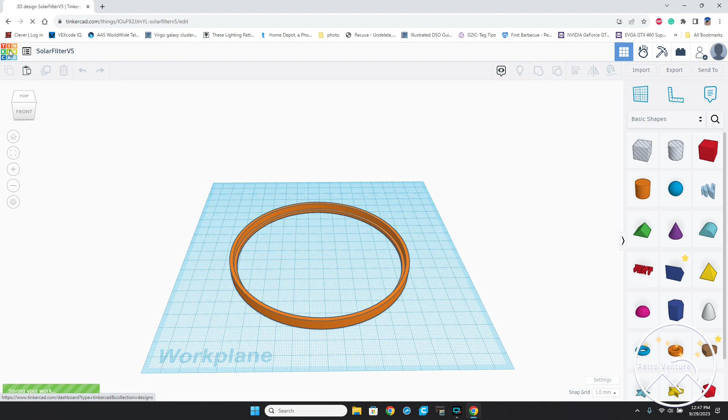So we're going to go ahead and get started here with a 3D design. First thing I'm going to do is grab a round. The program I'm using is Tinkercad, a free program to do 3D design. It's very simple, a great one to get yourself started. Of course there are more advanced programs, but this is great to get started. Go to Tinkercad.com, sign up, register an account, and there you go.

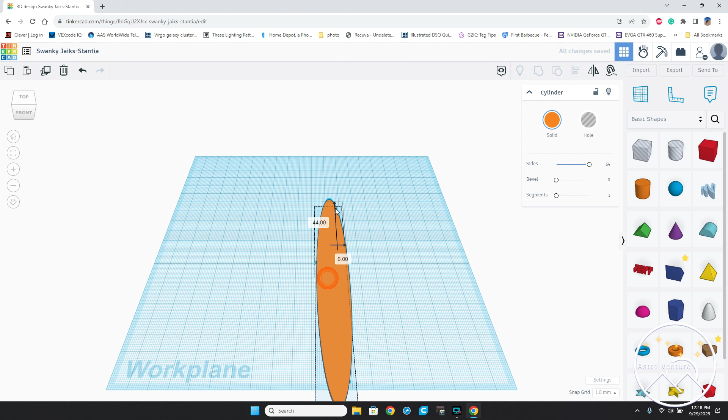So here we go. I put the sides, slid that up to 64 so it's nice and smooth. This is going to be set at 2 millimeters. The size I'm going to need for this is 149 millimeters. The reason I'm doing 149 is the 3D printer I'm using prints to a maximum of 150, and I never run my printer quite to the edge. Okay, so this is one plate that will be used as part of the lens hood end.

The end is going to actually slide on the lens hood. Okay, next, bring this over here. For this one, I'm again going to slide the sides over so it's nice and round. My height, I'm going to set this at 27 millimeters. The reason is I want 1 inch, and 25 millimeters is an inch, plus the 2 millimeter thickness of this bottom plate, so together that makes 27.

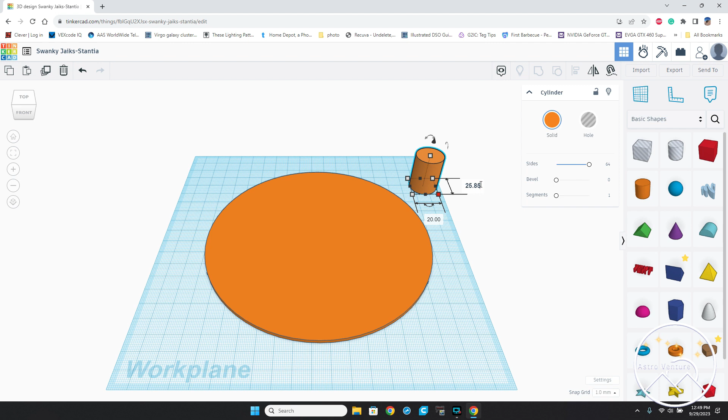Okay, next I need the outer diameter, and based on the hole that needs to pass through and wanting 2 millimeter walls, I'm going to make this 125.85 millimeters. I'm going to bring this over. Then I'll hit Control A to select them all, and align this so it's centered. And again, selecting them all with Control A, I'm going to join these two so it's one solid piece.

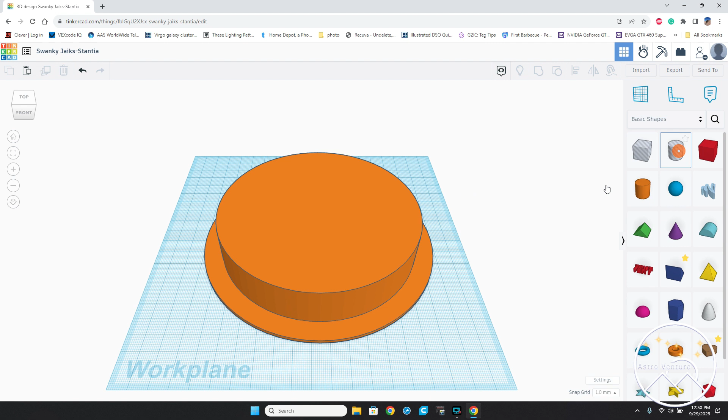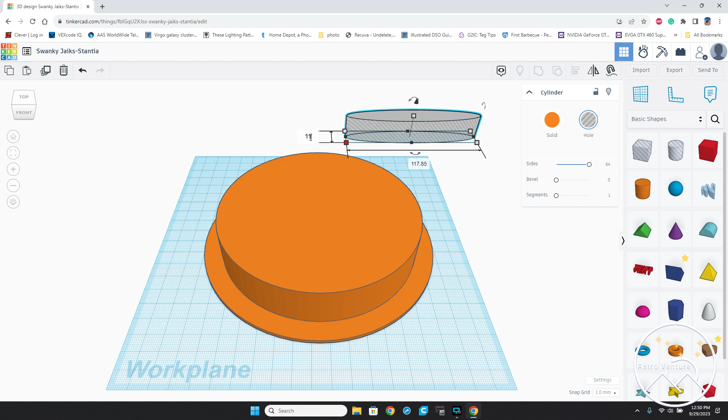Okay, next, I need to pass a hole through for the lens hood to go on, but I don't want the lens hood to hit the actual solar film. So I'm going to build a lip down inside, and you'll see what I mean. To get started, I'll bring a hole over onto the platform, set the sides to 64 so it's round, and set it to 117.85, then move this over. I'll set this to 117.85 again, and make it tall so it punches all the way through.

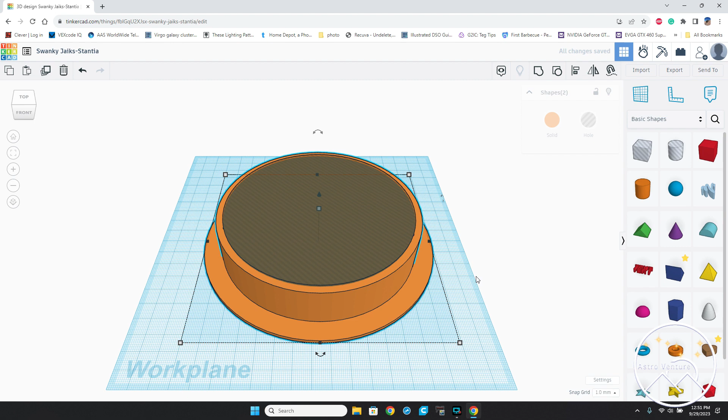27 is the maximum height, but I'm going to go ahead and set it to 28. I'm going to slide this over, hit Control A to select all, and align again. There we go, it's all centered. Control A to grab it all, and I'm going to make it into one. Okay, so here we go.

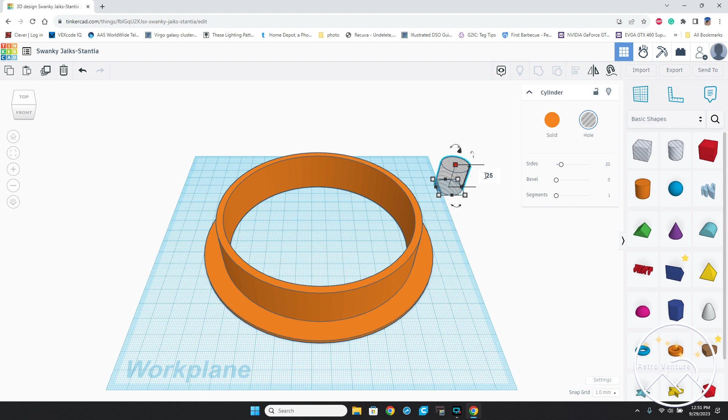We now have that hole passing through, but as I said, I want a lip down in here to prevent the lens hood from sliding into the actual film. So I'll grab a hole again, bring it over, and set the height on this one at 25. The reason is because I'm going to lift this off the platform by 2 millimeters, and that's what you're seeing here. It's now off the platform by 2, so that'll give me that lip.

Now, the size that I need, as I said earlier, the inner diameter, the opening that I need, specifically to my printer, messed around with to get exact—I need 121.85 millimeters.

And then I'm going to come over here, 121.85 millimeters. I'm going to slide my sides up to 64 so it's smooth and round. I'm going to drag this over on top. I'm going to hit Control A to select all, and I am going to align. Here we go, we are aligned.

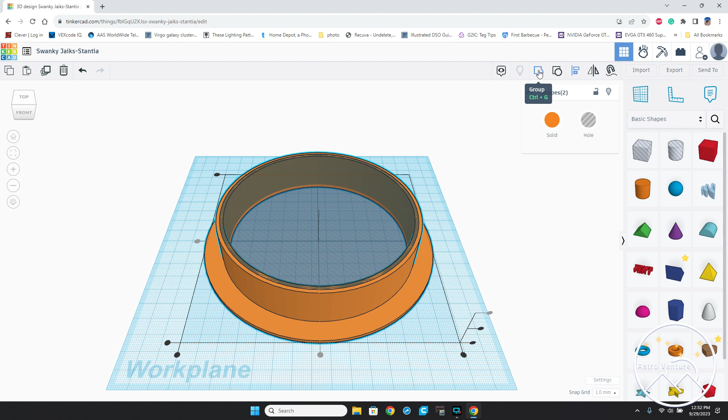Now what I will do is come up here and click Group, put them all together, and now you can see this lip on the inside. So when my lens hood slides down and in, it will bump into this lip now before it actually hits the film. Because of perspective, it looks like it's wider here and thinner here, but it's not, it's just the perspective of what you're looking at.

So here we go, this is the part that will actually slide onto the lens hood. Next, what I need to do is pass through some bolts that will join the plate that we're going to design in a moment, but I need to get those holes set up.

So I'm going to come back over, grab a hole, bring it in. 3 millimeters will work great for the small bolts that I'm going to pass through.

Now what I'm going to do is bring this over to the side. I'm going to select it one time, come up here and duplicate, and then move the duplicate over. I'm going to duplicate again, there's the third one, duplicate again, there's my fourth. So I have the 4 holes that I'm going to be setting up to go through this.

Okay, so let's grab this first one, I'm going to bring it over here. What I want to do is get this lined up, centered left to right, and lined up with this bottom edge. So I'm going to left click and drag, and because this box that opens goes over the screw hole we're about to put in and part of the solar filter bracket, it will actually select both of those. But notice I haven't selected any of these.

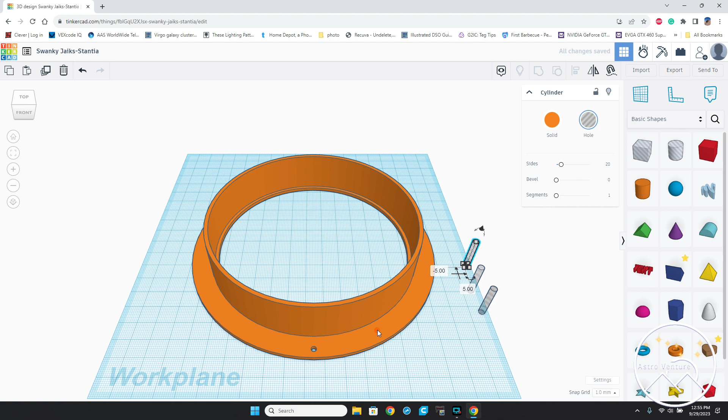Okay, now we're going to do the same thing, but I'm going to rotate this, and to rotate I right clicked and held that down so I was able to rotate. Now I'm going to go ahead and center this up. I can press down on the mouse's rolly wheel and slide it over.

Okay, now I'm going to grab this hole, slide it up here to the edge, release, left click and drag the red box so that I select both the hole and the bracket piece. Do my alignment again. It looks like, because it's light gray, I'm already lined left and right. Let me see, oops. Okay, so it looks like I'm already aligned, just happened to be sheer dumb luck.

Now I'm going to come over here to this edge to get the edge aligned. There we go, I left clicked anywhere else to deselect. I'm going to left click on the hole, 3 times on my arrow key to move it away from me. And there we go, it's now in the spot that I want. Left drag to select and group those. Okay, and again, right click and turn.

Here we go, I'm going to grab one of the holes, bring the hole over, put it at the edge, left click and drag so I select, align, we're already aligned there, and then edge align. There we go, left click 1 time on the hole, arrow key away from me 3 times to move it in 3 millimeters, left click and drag to select, and I'm going to group again. Okay, now I'm going to grab this hole, move it over here.

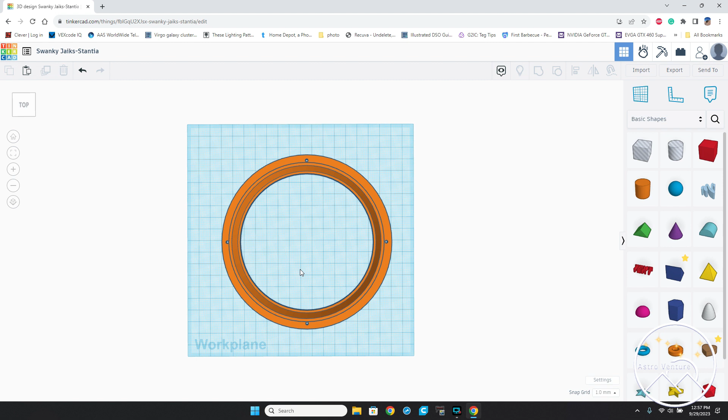There we go. We now have this set up so we've got an inner lip that'll hit the lens hood. We've got a 2 millimeter wall that will slide onto the lens hood, and then we've got this outer ring which will help to clamp the solar film down, and we have our holes here for bolting it together.

So what I'm going to do is come up here to the left, and I am going to label this as lens sleeve for my filter. I can click anywhere else, and then I will left click on export, and I will export it as an STL, and it sent it to my downloads.

From there, if you have a 3D printer, you would know what to do with the STL, and you open up whatever program it is you are going to use.

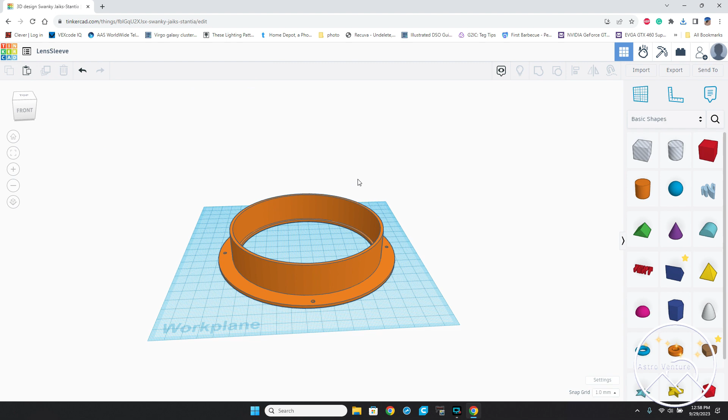Okay, next, we're going to go ahead and create ourselves a new design, and what it is we have to build is the other side, the other plate that will be farthest away from your lens, because that first piece actually slides on the lens. So here we go.

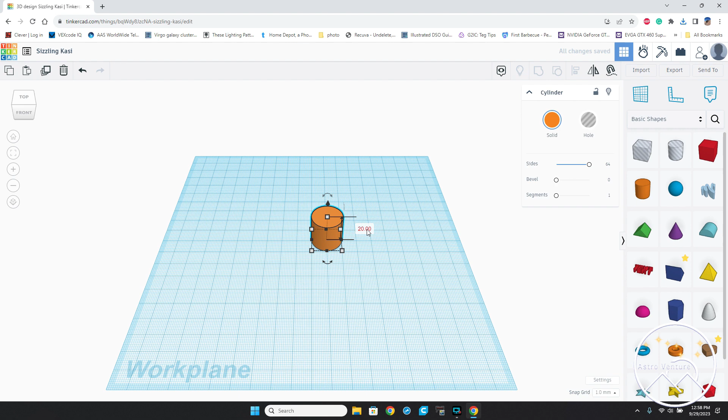We're going to take this, bring it over, and again, set it to a 64 so it's round. I'm going to set the thickness to 2 millimeters. I'm going to set the diameter 149 millimeters, and then 149 millimeters. There we go.

I'm going to slide this over to the center. And then what I'm going to do is I'm going to be putting that hole through here, leaving that lip that we had designed into the other one, so that way it matches the narrowest point from the lens sleeve. And to bring that over, here's the hole.

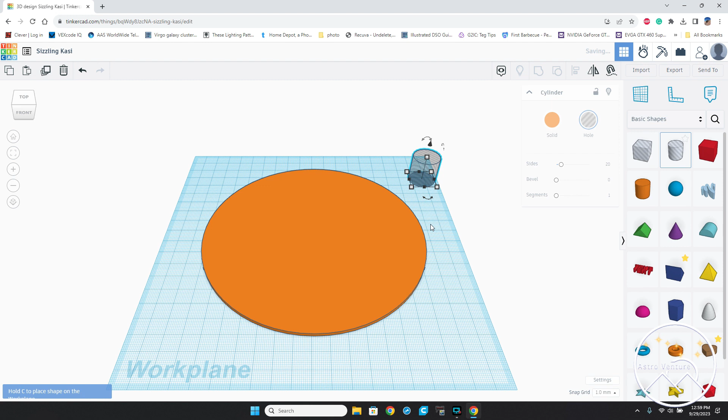And on this one, I can leave it at the height it is. That won't matter. But that inner hole was 117.85, and then 117.85. Okay, slide this over to 64 so it's round.

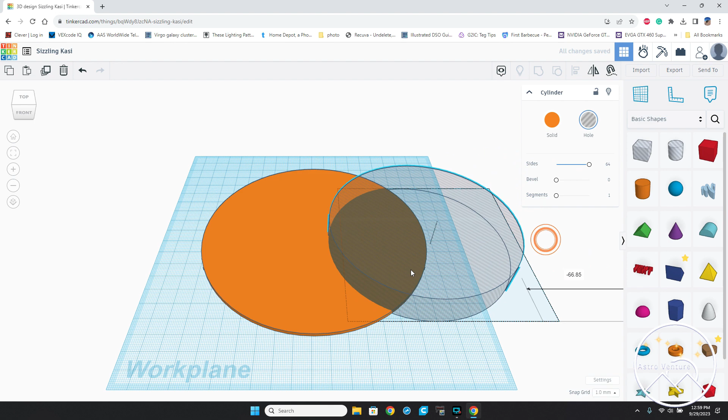Left click drag, drop it on top. Control A to grab everything. We're going to align left, right, front, back. And now we can group it all. There we go. Now we need to put our holes in so that it will bolt up and match up.

Okay, grab a hole, bring it over here, and we're going to set this to round. Set this to 3 millimeter and 3 millimeter. There we go. I'm going to move this to the edge.

I'm going to duplicate it, and I'm just going to use the arrow key and slide it up. I can hit duplicate again. There's the third, and one more time, there is the fourth.

Okay, so here we go. Let's bring this over, and we're now going to left click, select both, do our align, left, right, and then edge align. And again, I'm moving these away from me by 3, 1, 2, 3. There we go.

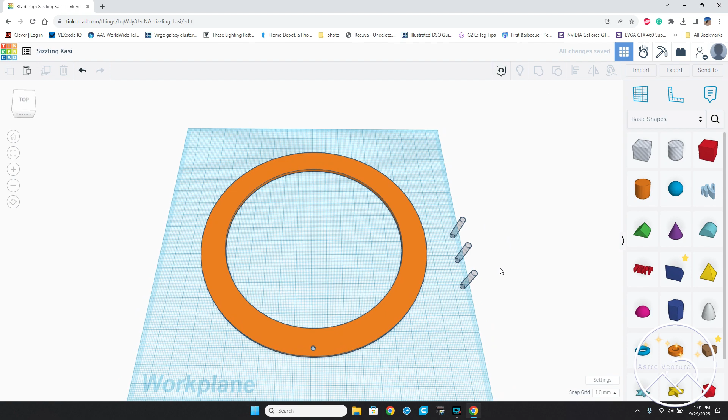I can select both now and group. Okay, next we're going to rotate. Bring this over so we have this edge. Okay, and there we go.

Drag this up here to the edge. Left click to select both. I'm going to align, left, right. That's already good. Front, oops, didn't mean to do that. Meant to do an edge align.

There we go. Left click on the hole, 3 arrow keys away to bring it 3 millimeters in. And left click and drag over so that we select them and group.

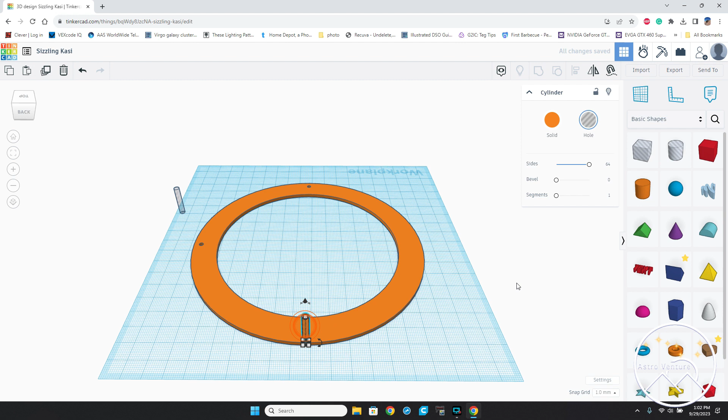Okay, again, right click, drag and rotate. Bring one of the holes over here to the edge. Left click and select to get both. Align, center, edge align. Left click on just the hole, arrow 3 times away. Left click to deselect, left click and drag to grab all, and group.

Okay, last one. I'm going to grab this hole, bring it over here, put it along the edge, left click deselect, left click drag to select both. Align centered is good, and edge align.

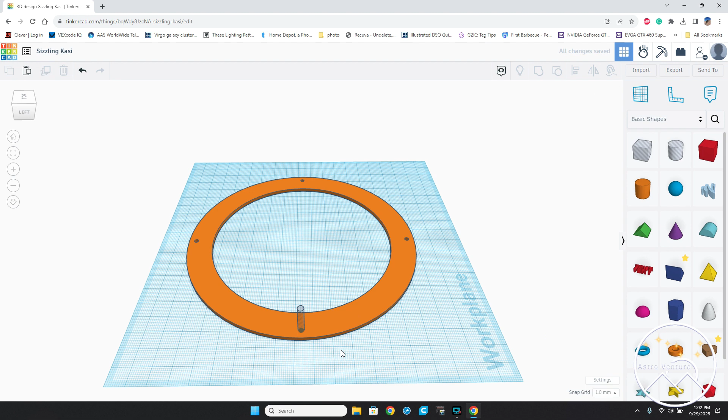There we go. Left click on the hole, 3 arrow keys away. Left click to deselect, left click drag to select all. And there we go. Now we have this.

Now I'm going to label this as lens plate. Enter. I can now click export to download the STL.

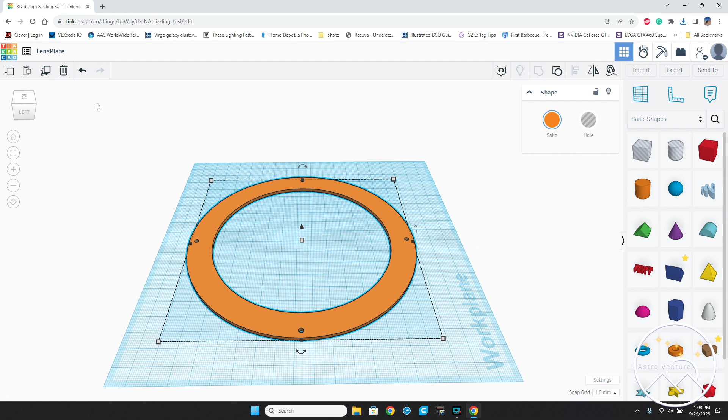And then just to show you, I'm going to Control C, copy, and I am going to go back to the previous just to show you how they line up. And then you would end up getting a bolt to pass through on each one of these. Okay, I'm going to lift this up off of the bed now.

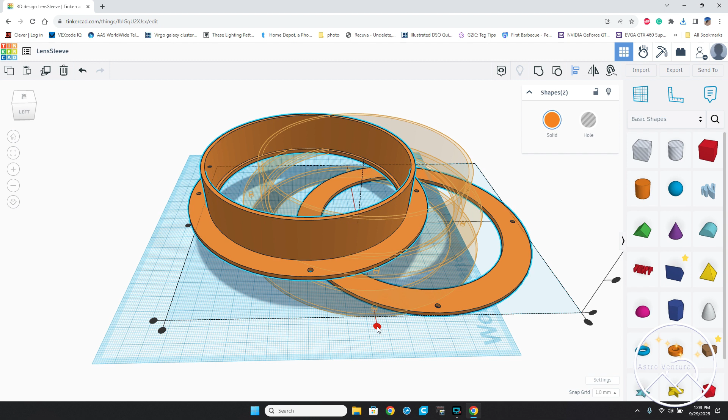I'm going to Control V to bring this in, Control A to select all, and click on the align tool. There we go, left, right, front, back.

Now what I'm going to do is put this down, but keep it 2 millimeters off the bed because that's the thickness of the plate. There we go. Now I am going to click top view, and as I press the mouse wheel down, you can see the hole passing through on each one of these, so you know that they will align. And there you have it.

The biggest takeaway from this is you need to do those practices with the printer you're using, getting that sleeve, that inner hole, to the exact diameter you need. Then from here, the next part would be after this is printed, I will rejoin you and we will assemble all of this and get it going. There you have it.

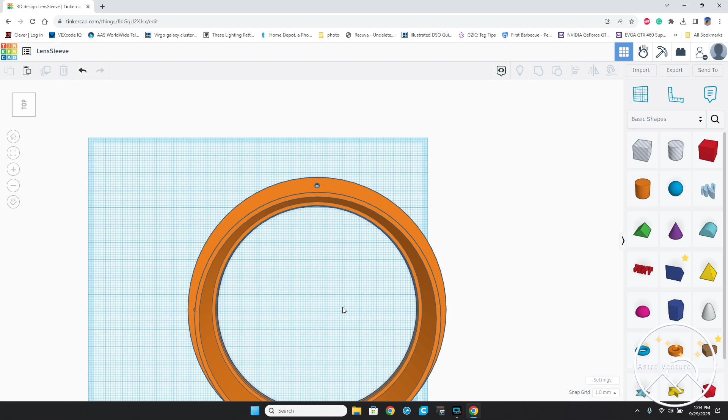Okay, so here we are in the slicer that I use for my Adventurer 3. This is FlashPrint from FlashForge, and we're going to go ahead and get started. You can see this barely fits within the Adventurer 3, but it works. I have larger printers, but this works for what I need.

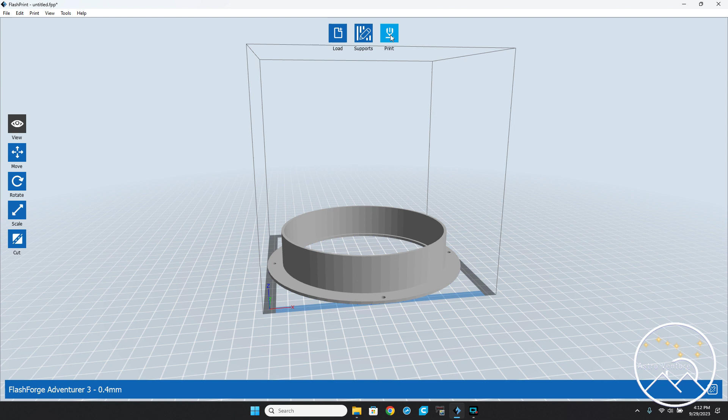Now if you use FlashForge printers, you may notice this is some older software. It is. But I'm very much one of those people that if the software is working, I don't update it, because I don't want to create new problems unless there's something in the update that I really want. Otherwise, I stay where I am.

So here we go. What I'm going to do when I get this printing is set my layer height at 0.16, and my first layer at 0.2. Yes, with 3D printing we do a larger, heavier first lay down, but I don't want to go messing up the holes for the bolts where we assemble all of this. So I'll go with 0.2, and I find I don't have any problem with that staying down.

And then my infill for this, I'm going to leave at 15%. And then let's see here, first layer... there we go. Travel speed, base speed, first layer maximum speed.

I like to kick that down to 5 millimeters per second. I know it's slow, but I have found that consistently, if I always throw down that first layer at 5 millimeter movement speed, it works out really well for me. Other than that, I'm going to leave it where it is. Let me make sure I don't have any kind of enable raft. No, I don't want a raft on this, because I've got enough surface area for it.

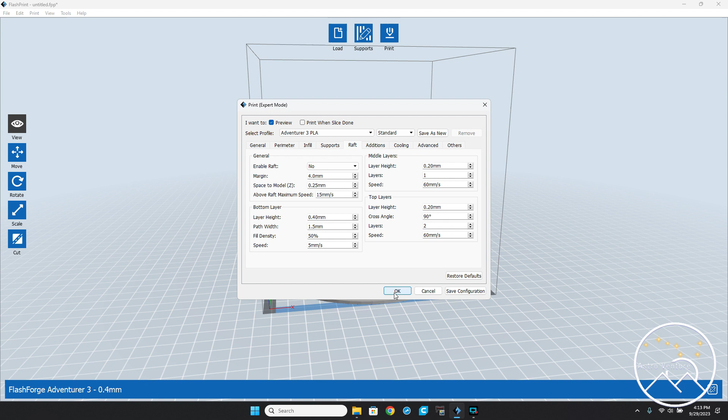Okay, there we go. We're going to start this, let it slice. Again, if you're doing 3D printing, this is nothing new to you, and this is not intended to be a video for you to learn how to use your 3D printer.

Okay, lens sleeve, here we go. Save. And it looks like this is going to be a 4-hour, 15-minute print. It's going to take a little bit of time. Boy, am I really missing my Friday date to get this out.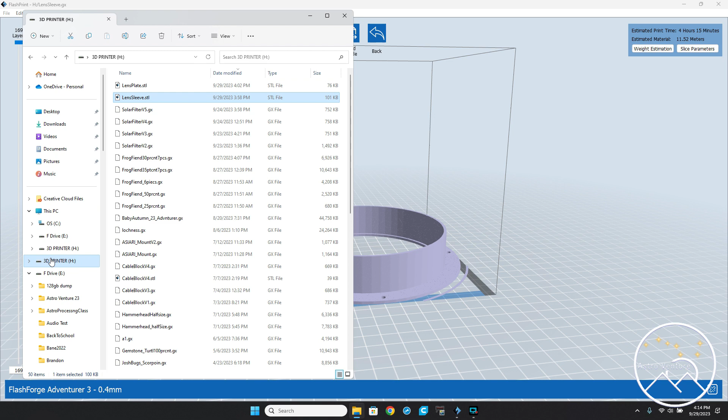Okay, so here we go. I'm just going to check, make sure it is on my flash drive. Let's see here, 3D printer, lens sleeve, there it is.

And you know what, while I am here, I'm going to go ahead and close this and open up FlashPrint again, and I might as well go ahead and get the lens plate part finished as well. No, I don't want a new layer or a new version.

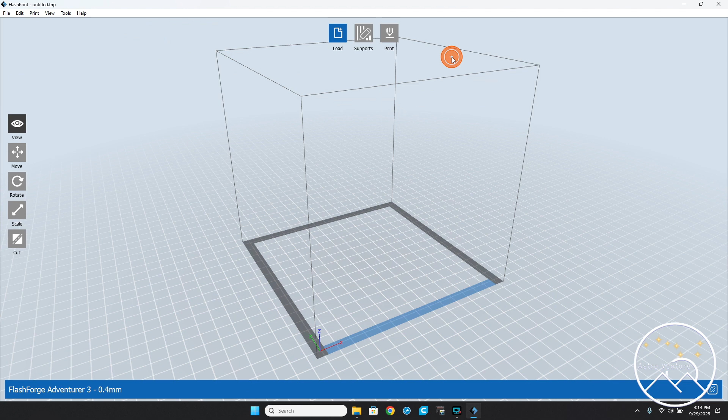Let's see here. I apologize for the bit of sniffling, allergies kicking in there. Okay, I'll throw this on here, put it on the platform. There we go.

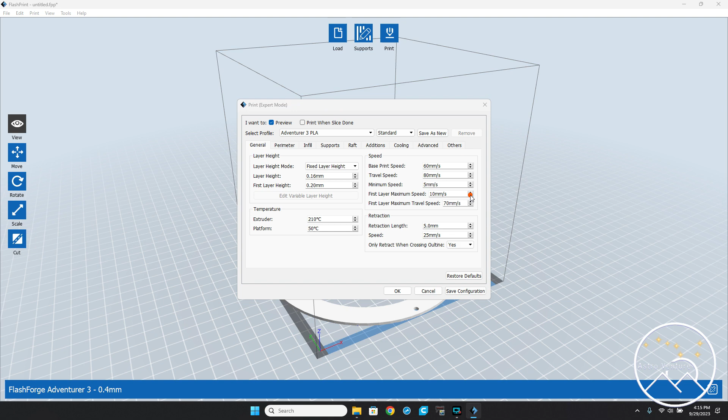Okay, print. Kick this down to 0.16, layer height 0.2. Raft? No. Infill 15, and then my first layer maximum speed 5. Okay.

Send that up to the 3D printer, save. And here we go, this is going to be 2 hours for just this piece alone. There we go. Okay, I have everything I need. Let's rejoin at the printer.

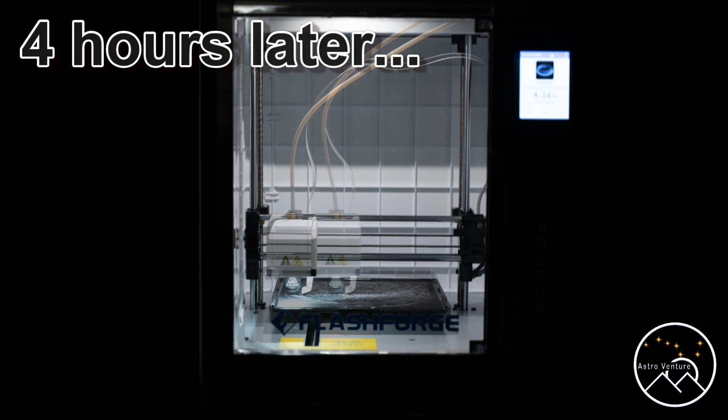Okay, let's get started. So a few supplies that we're going to need here: this is the 2mm foam that I got from Hobby Lobby, and again, 2mm works great. We're also going to need our lens hood that we 3D printed, and we will be needing a razor blade and a Sharpie.

Now, to do this, what we're going to do is place the lens hood onto the foam, and we will go ahead and trace that around.

There we go. So we've got the lens hood traced for the outer, and then we're going to need to trace the inner, because all we're needing is, so to say, a gasket in the center to hold our film down. So there we have it.

Next I will go ahead and take the razor blade and cut this out. I'm going to stop the camera at this point, because it's going to take a little bit of work getting in here and precisely cutting this. It doesn't have to be that precise, but it'll be easier without the camera in the way. Then I'll cut one more of these gaskets, so that way I have one on each side of the film that goes into the bracket.

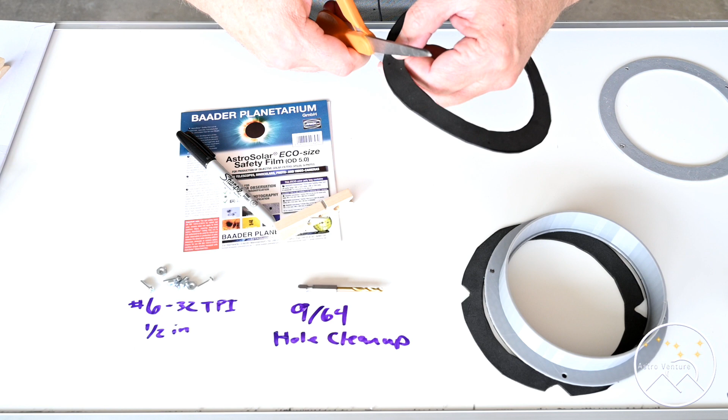There we go, there's one. Trim this one down, and then once I do this, I will place it onto the lens plate and check my fit and make sure that I am good. Okay, so there's my scraps, push those out of the way, and then I can lay this up on here and make sure that looks good.

Looks like I might need to trim this one just a little bit.

Now, the film that I am using is, I ordered some Baader solar film. They do have some instructions for being able to make your own solar filter using cardboard, tape, and things. Personally, I just prefer doing something a little bit stronger, a little bit more rigid like this here.

Okay, excellent. So now what I'm going to do is go ahead and assemble this, make sure everything fits, because I don't want to find out that something doesn't fit when I get to the film part. There we go. And I can go ahead and drop this on.